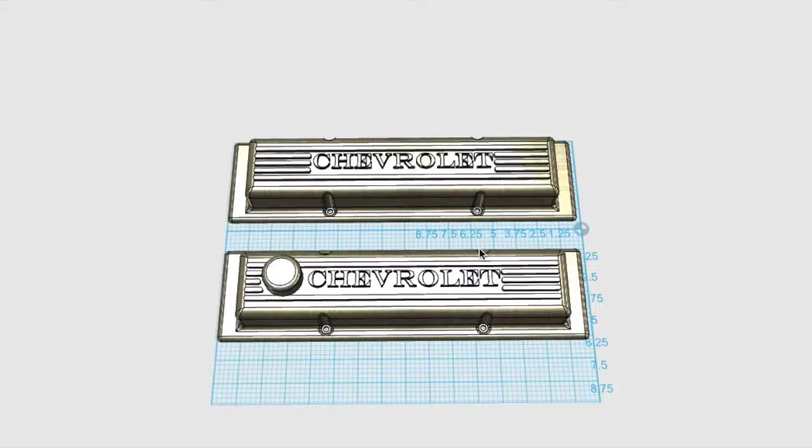Hey guys, this is Caleb, and I did a set of valve covers for a small block GM motor in 123D Design.

This is probably the most intricate thing I've done, as I've just started to learn the program. I've had a small bit of experience before in drafting class, and I've designed a couple little keychains and all that, but this is by far the largest thing I've designed.

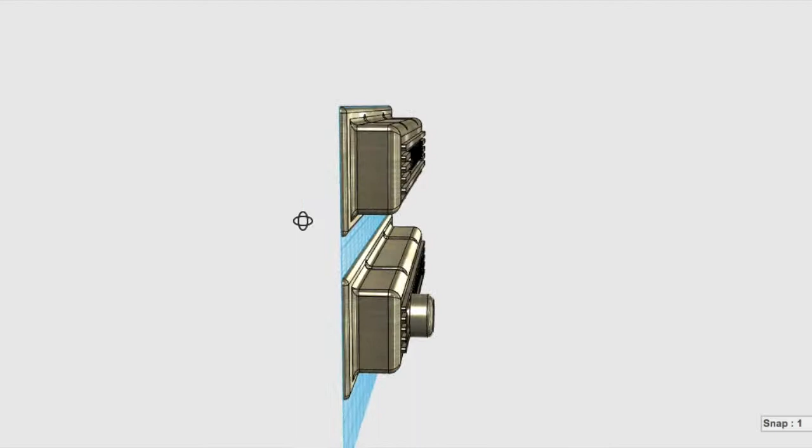The program itself is different than what I'm used to. I'm used to their normal AutoCAD program, and their 3D behaves quite differently than the 2D. Regular AutoCAD is capable of 3D design, but 123D Design is all 3D, obviously.

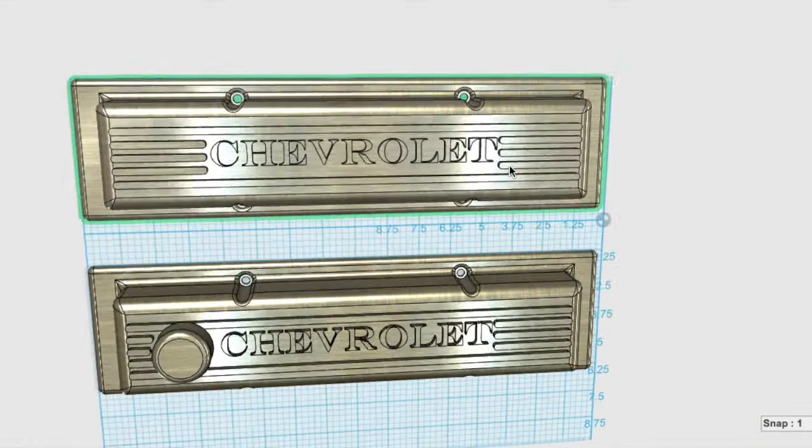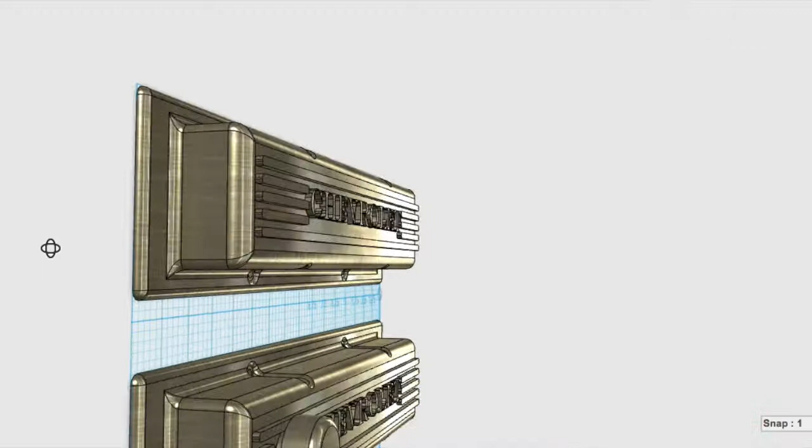One of the hardest parts about this was spacing out all of this slotting right here and raising it up properly, because once I copied over this second cover here and took off the fill cap, I had to put more slotting in, and I might have messed up the spacing by thousandths, but you know what, it's a learning experience to try to copy that all over, because there is a measuring tool. I don't have it on this screen recording, but there's a measuring tool up there that lets you catch that measurement.

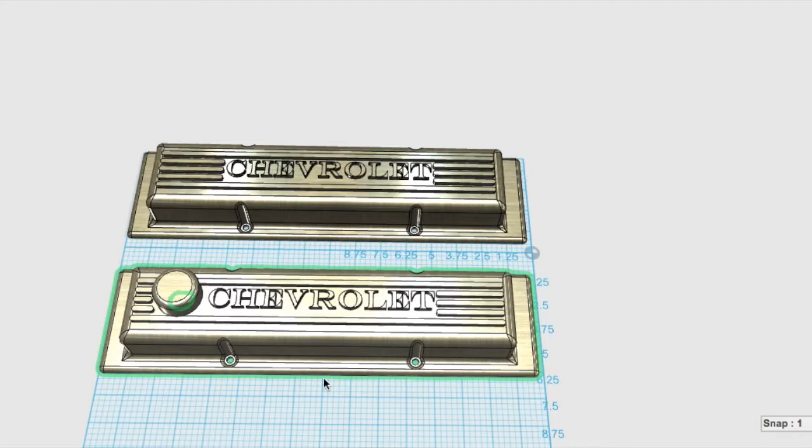As for all these holes, I just drew lines out across the edge and took a line down, made a circle on the end of it, and then filleted the holes all around. I think I made them 5/16. And the slotting was just spacing out, making a rectangle, dragging it across.

As for the text, it's a recent feature because they keep plastering it all over when you start the program. You can actually enter in 2D text and raise it up.

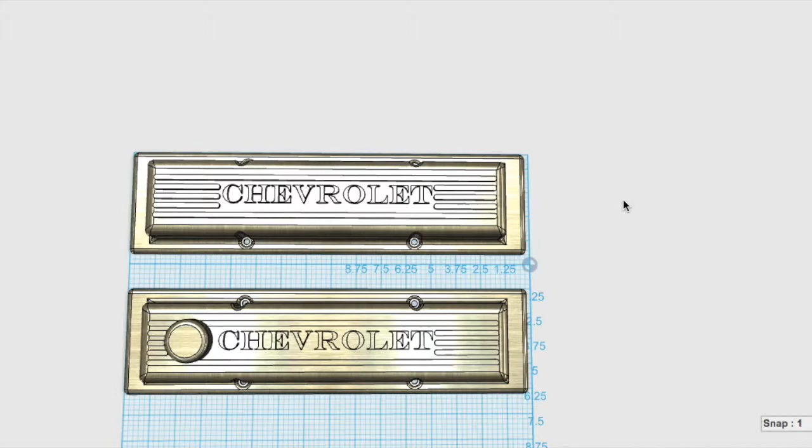The problem came for me there is when I put the text in, you could see it underneath the black text, so I actually had to come all the way up in here, this way up past the plane, if it'll zoom in, then drill a hole through the bottom and then come in and delete the text from underneath it. So they do kind of need to figure something out that would help with that. Either that or I'm just not smart enough.

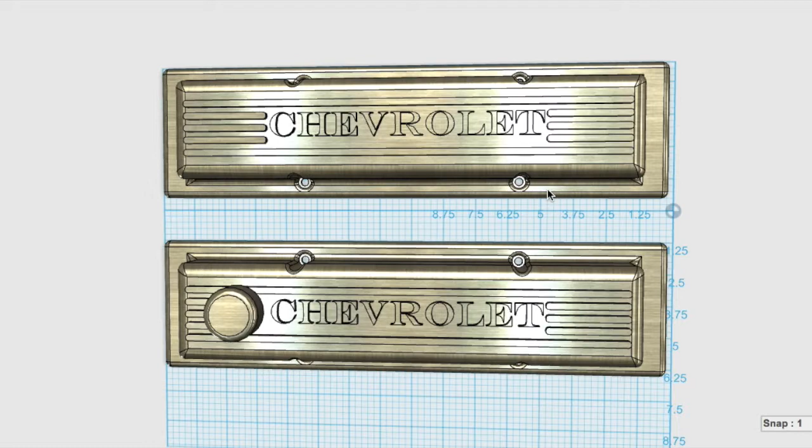As for the fill cap, that was an easy one. Just raise up a couple circles. And then a lot of this fancy curvature is just the fillet tool. It's really easy, just press E. It asks you to select an edge, which I'm not going to mess with it right now.

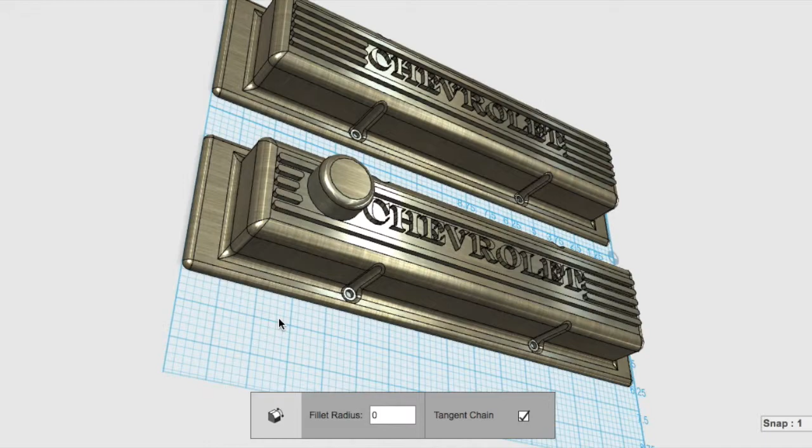It wasn't a terribly challenging project, but it still challenged me to learn more of the features of the program. There's still a lot for me to learn. There's tools I haven't messed with yet, because I know there's pattern tools up here, the combining, that kind of thing. I haven't messed with the snap to see how to use it. But yeah, that would be my project.